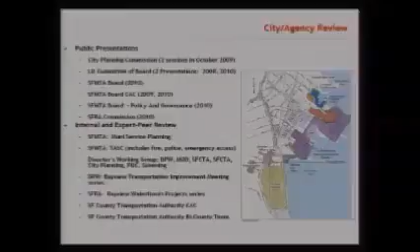What I'd like to really do with this presentation is explain my role as the MTA coordinator for the transportation issues here. The responsibility to make sure that this project, as it develops, reflects the priorities of the City and County of San Francisco, the priorities of MTA, and the priorities of the community processes that have gone on, has been my main responsibility.

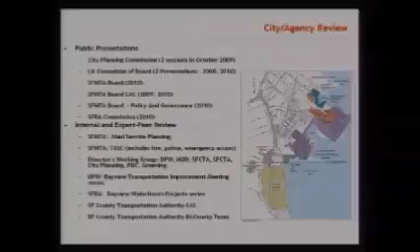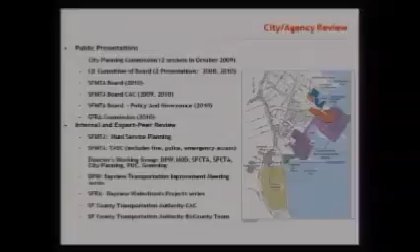This list that you see on the screen right now is a list of the public presentations we've gone through, including work with the Planning Commission. I've come before you last year twice, the Land Use Committee, the Board, the MTA Board, the MTA Board's committees, and the Redevelopment Agency Commission. I think it's especially conscientious of us to make sure we get the vetting and the technical input from the transportation professionals and engineers in the city that have the responsibility to implement and operate this transportation plan.

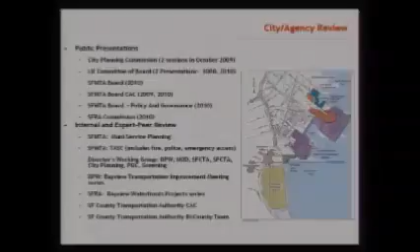In doing that, I worked very closely with Muni Service Planning. Muni Service Planning is the group that's behind the Transit Effectiveness Project. They're the people who have the methodology to analyze and develop a transit plan that is sustainable, a transit plan that is efficient. I also work closely with SFMTA's TASC, which is a review board that includes the fire, the police, the emergency access folks, DPW, and city planning, to make sure that as we design a roadway network, it is not just efficient, it's also safe, it's also flexible for times of emergency, and that it meets the criteria of all the codes that apply.

We, as a team, including MTA, brought the presentation before the Directors Working Group to make sure that the directors of key departments, including DPW, Mayor's Office of Disabilities, the Transportation Authority, the MTA, the City Planning Department, PUC, and Greening, had the chance to review and give input to the project as it was developing.

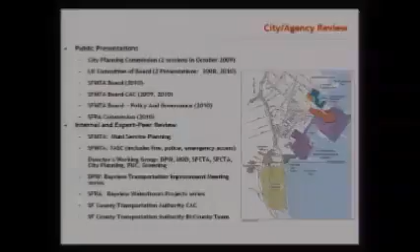There are major projects that were underway in the area. This is not the first transportation planning that's been going on in the southeastern part of the city by a long shot. And to make sure that we're paying attention to existing planning decisions and plans, we work closely with DPW's Bayview Transportation Improvements Project. We work very closely with the Redevelopment Agency and their Bayview Waterfronts Plan, which has included the environmental assessment. I worked very closely with the Transportation Authority on two levels. One is the bi-county team.

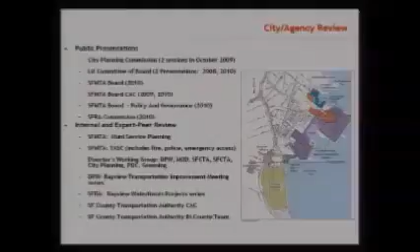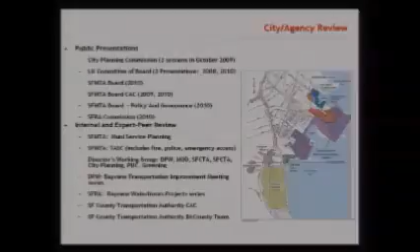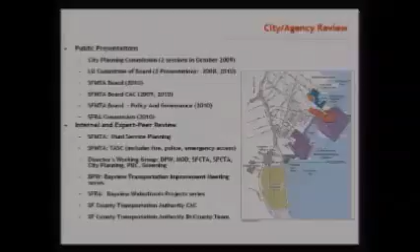The map that you see on the screen right now shows that there's much more going on in southeast San Francisco than just the Candlestick Point, Hunters Point Shipyard project. There's work going on in Executive Park, in Visitation Valley, in India Basin. And south of the city and county line, there's a major project going on in Brisbane. We needed to make sure that we were coordinating and being consistent with the transportation solutions coming out of those projects, and that we thought about the regional projects as well as the local projects and made sure that they dovetailed well, that there were seamless connections, and an overall more efficient transportation plan.

In that context, to develop a plan that worked for these neighborhoods, we wanted to use the benchmarks that the City of San Francisco already has set. For instance, a transit-first neighborhood. Per city policy, we looked at strong transit-served neighborhoods in San Francisco as our benchmark. Currently the broader area has a 66% drive-alone mode split for the commute period. Our goal was to have it lowered to 45%, which is consistent with a lot of neighborhoods in San Francisco, and then to nearly double the proportion of people who are taking transit to work.

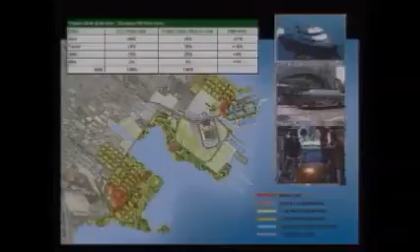To look at increasing the walk mode split and the bike mode split as well, to really get a multimodal transportation plan. It's not just a set of aspirational goals. It is the guidelines through which we develop the very infrastructure of this plan. Sizing the roadways, making sure we had the transit facilities, understanding the way transit operates, thinking about the bike connections and the pedestrian connections to make sure that this was truly multimodal and that we could build the best possible environment for the system to operate.

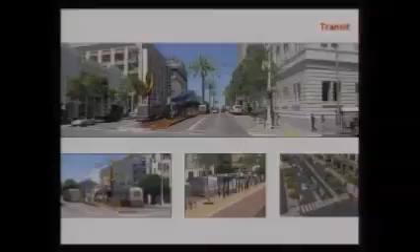Now, to walk through that environment, I'd like to take it mode by mode. We'll start with transit. The images on this page are bus rapid transit models. This is a very important signature part of our transportation plan in the shipyard. And these are images from San Francisco as we're going forward with bus rapid transit in a few key corridors. You've heard about Van Ness, you've heard about Geary.

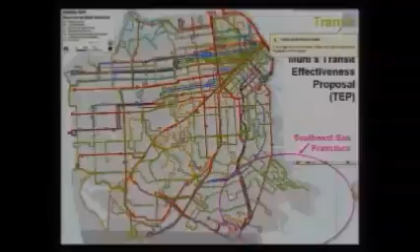This will be a part of the transportation network I'll explain, but I'd like to start off first by showing how we started approaching the transportation planning. The TEP, the Transit Effectiveness Project, is the latest and most current data and most comprehensive transit information that the city's had in 25 years. I work closely with Muni Service Planning to create as our base the Transit Effectiveness Project, and then to look specifically at the southeastern part of the city.

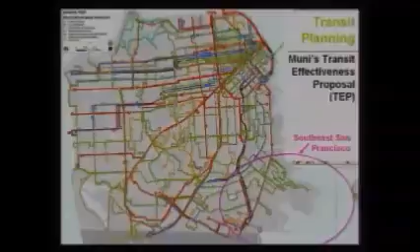If you see in the diagram, it is one of the most isolated neighborhoods in San Francisco from the perspective of transit service. Not just the Hunters Point Shipyard, not just the Candlestick Point area, but the neighborhoods that are adjacent to it. And the goal in developing a transit network here is to address that isolation, again, lift that whole corner of the city up to the level of good transit service that's enjoyed by so many neighborhoods in San Francisco. To do that, we wanted to start by looking at the local buses that came up to but didn't quite serve the Hunters Point Shipyard and Candlestick Point area.

This diagram shows those buses that, working with Muni Service Planning, we identified would be the best lines to extend into the community. They include the 24 Divisadero, the 48, the 29, the 28. If you know these lines, you know that they serve all four quadrants of San Francisco, and they give people in this new neighborhood a one-seat ride to neighborhoods outside their area.

And we also wanted to make sure that these would be efficient and affordable extensions, so we worked really carefully to make sure that if we extend these lines, we know how much that costs, we know what the vehicle needs for that would be, we know what facilities we would need in the future to maintain those vehicles. It's a fully allocated way of analyzing transit service.

So with the baseline of these lines, we wanted to pay attention to a very important connection for the area. Isolation for transit service isn't just local, it's also making sure, if we overcome this, that we have excellent connections to the regional systems. The regional systems we worked with from the base are BART, Caltrain, and although the T-Third is a Muni line, it serves like a trunk line that gives fast service between downtown and major transfer points.

To know the relationship between these local lines and the regional transit services, we had to identify where the hubs would be, to make sure that we're designing the frequencies and the connections with these hubs so that people can pretty effortlessly go from a local line to a regional line. That ends up being pretty important, not just for people who live here, but we realize that with the commercial and the recreation and destinations that are being proposed, you needed to make sure there was good regional access from outside San Francisco to this area.

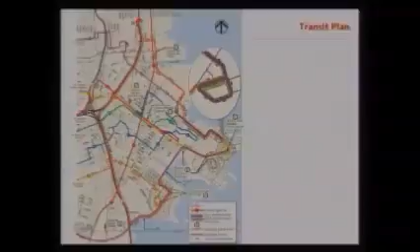That's the line we're proposing to be bus rapid transit. Bus rapid transit is like the light rail system in that it operates at high frequencies, higher speeds. It needs to be protected from mixed traffic.

So to design bus rapid transit, a key part of that is coming in through the interchange that we're working on with the Transportation Authority to make sure that the bus is not affected by freeway on-ramp and off-ramp traffic, to make sure it connects directly to the Caltrain station and BART, so we're designing a multimodal, multi-layer transit station at Bayshore Station with the help of the Transportation Authority, direct access to Balboa Park BART,

and then to connect the two neighborhoods as quickly and efficiently as possible and to minimize the risk of that bus rapid transit being delayed in traffic, which is one of the reasons that the Yosemite Slough Bridge, which you'll hear a lot about and which I'll present later in this presentation, ended up being such a key conduit for the transit planners at MTA to offer a protected right-of-way for buses where they would never have to deal with loading, parking, and mixed traffic, to help the buses become reliable.

Our models show that the reliability and traffic speeds for the bus rapid transit with such a facility brought tremendous transit mode split increases, both for people making the local trips and people relying on the bus rapid transit to get to regional hubs.

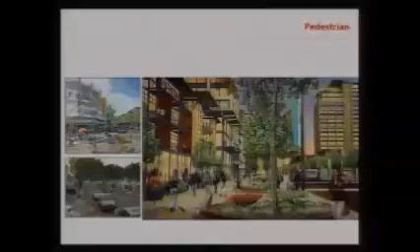The pedestrian network is also a key part of this plan. And in addition to working with the Better Streets concepts, which you should be familiar with if you're working in partnership with MTA, DPW, and the planning department, you'll see that we use the Better Streets plan to identify different street typologies: boulevards, residential streets, alleys.

We also use the strength of San Francisco's grid system to extend the grid in a pedestrian-oriented way from the existing Bayview neighborhood into the Hunters Point and Candlestick Point areas to make sure that people had safe and multiple pedestrian options to walk to and from the area. We felt that, like the transit network, to be able to offer improvements that address the broader southeastern part of the city as well as the shipyard and Candlestick Point was a very important goal.

Two other regional systems that are pedestrian trails incorporated here include the Bay Trail. We worked with ABAG to make sure that we had connections to their Bay Trail network, and the Blue Greenway, which offers a pedestrian and bikeway through the center of the city into the shoreline.

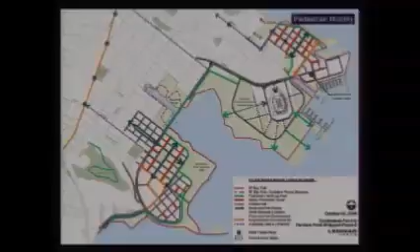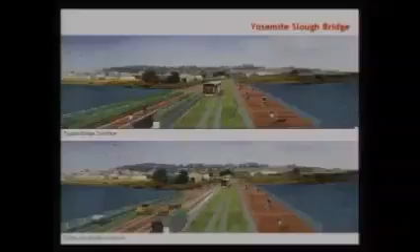In the stadium option, the eastern side of the bridge could accommodate as much as 4 lanes of automobile traffic to help with the egress and help ensure that automobiles leaving the stadium don't impact residential neighborhoods. But essentially, what is always intact is the bus rapid transit service and the pedestrian and bike network on the bay side.

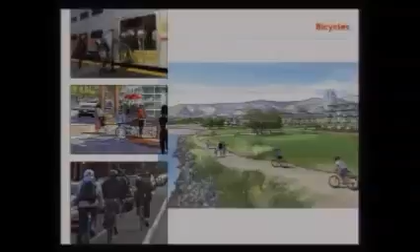The bicycle network as well, working with MTA, I worked very closely with the bicycle planning team. As you know, we've come over the hurdle of the injunction, and we're free now to implement bike networks. We wanted to make sure that the implementation of the bike network was consistent with the citywide bike plan, and that we strengthen portions of the bike network in this area to include bike lanes, off-street trails for recreational use, commute bike facilities that help people go quickly from one part of the area to the other. Again, that's where the Yosemite Slough Bridge became important because of the shortcut it offers bicyclists.

And then to make sure that we have the difference between a Class 1, Class 2, and Class 3 bike facility incorporated in the network so that we have that rich variety of different uses that people might want to make a bike trip for: commuting, recreation, residential, and transit connections.

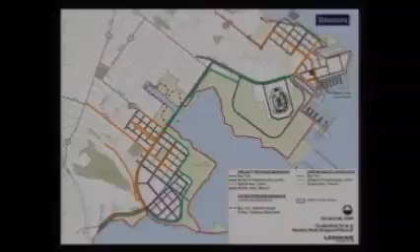And then accommodating the automobile program in the neighborhood includes not just the roads that are designed in the project area, but the connections from the project area to major arterials and to the freeways. Understanding the position of this area and its location at Hunters Point and Candlestick Point gave us access to 2 freeways, 101 and 280, but we wanted to design the roadways so that there would be capacity for special events

as well as day in, day out traffic management, and selecting key streets like Gilman, like Harney, like Innes, to allow the capacity to go from the project area to these arterials and the freeways, and to make sure that we protect the residential areas from traffic impacts and protect transit operations so that where there was a transit priority street, such as Palou, the traffic signalization and monitoring program and the management system would enable transit priority to function well.

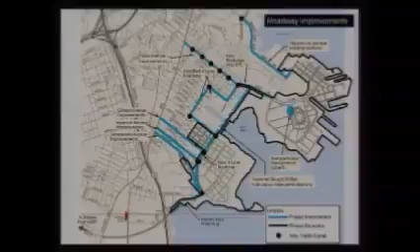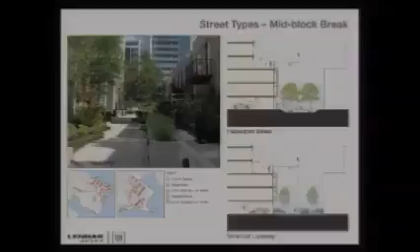These diagrams show how we've incorporated key parts of the Better Streets Plan into the area so that there's consistency with the Better Streets Plan and the quality of life that we hope to enhance in the project. For instance, the residential street types include mid-block breaks. These could be pedestrian-oriented alleys or lanes that accommodate vehicle traffic.

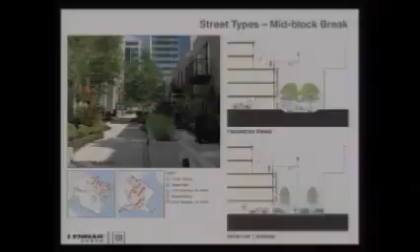They're consistent with the Better Streets Plan, but the point of these is critical, is that they are nice urban places to be, that the urban design of these streets includes landscaping, includes the dimensions to make sure that we minimize the negative impacts of transportation and maximize the public benefit of open space. Sidewalks are open space. And we realize that through an alley and boulevard network that's well designed and well landscaped, as we have this opportunity, we can build beautiful streets that are also functional.

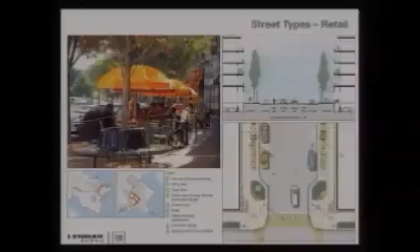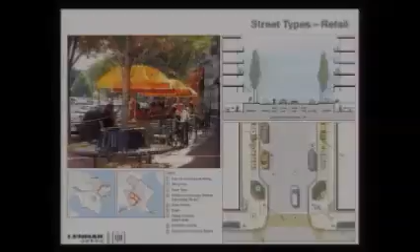That includes the retail component. The mixed uses that go on with retail include parking, loading, through traffic, transit, and pedestrian. To accommodate all of those complex functions, we looked at such measures as sidewalk bulbs, where they can be increasing safety for pedestrian crossings, right-of-way allocations for rapid transit buses and for local buses, on-street parking to help the retail, and at the same time through traffic on the right kinds of arterials to allow traffic operations that go through the area to be efficient.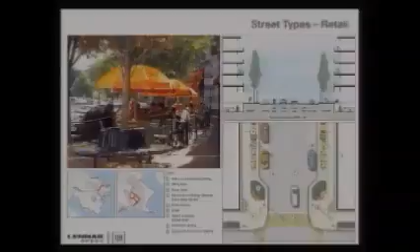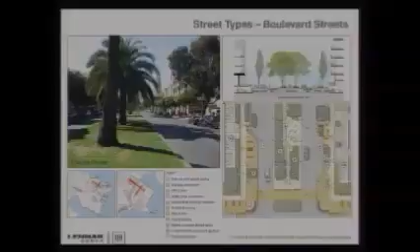I want to bring out an example of flexibility. It's very important that we understand that the transportation plan is implemented over phases. Not all of the transit network is needed when not all the development is there, but we want to make sure that the transit is in place as people move in so they can adopt a transit-oriented lifestyle and not have to live without transit service until a certain phase. So flexibility for phasing is very important. It is through all the modes.

The diagram that you see right here is Harney Way. And Harney shows big changes over the Harney that we know today. For instance, there is no transit on Harney Way right now. We include the bus rapid transit component. On the diagram, that's the right-of-way that's to the north edge of the street. North is up. To accommodate BRT, but then to allow the landscape medians to buffer people waiting for buses from the traffic and people living in a neighborhood like Executive Park from the traffic. We had this opportunity. We used the Better Streets guidelines to do that.

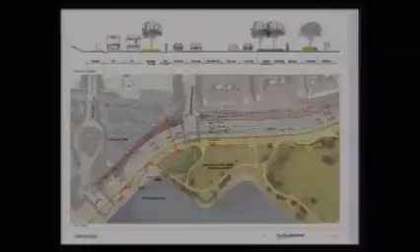But we also looked at future needs of Harney. And if, as the environmental review has shown, we possibly need to expand Harney to accommodate traffic, we wanted to build in that provision. So the two lanes that are on the very southern edge of the boulevard, they're shown in green, don't need to be fully developed until the traffic gets to the point where that's significant. And then we have the latitude in expanding that, 2 more lanes to accommodate Harney Way and still protect the bus operation and still design a pedestrian-friendly network. However, should we not need those lanes, we have the ability to keep them as they're shown right now, which are green medians that complement the state park and actually add a second layer of bike trails to the area.

So the bus rapid transit line, the local lines that come in through Palou are key parts of transit access to the stadium. We also allow shuttles and special charter buses to use these transit right-of-ways to reward the high occupancy vehicle mode split for the stadium access. We know how important it is that there be access to BART and Caltrain. And the bus rapid transit and local connections offer multiple connections to Glen Park BART, Balboa Park BART, the Caltrain station downtown, and the Caltrain station at Bayshore.

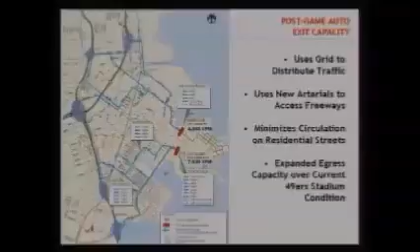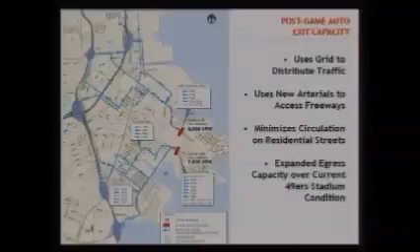And then finally, key corridors like Harney, Palou, Innes, and Gilman all are accommodating transit as well as accommodating the traffic egress. And you can see as you layer the transit and the roadway network that serve the stadium, we've looked at the capacity. We take advantage of the grid to disperse the traffic, but still focus the traffic on key arterials, to design those arterials for flexibility so we maintain capacity, and to point to both freeways, so not one freeway has the brunt of taking all the freeway traffic, as we know in the Candlestick situation today.

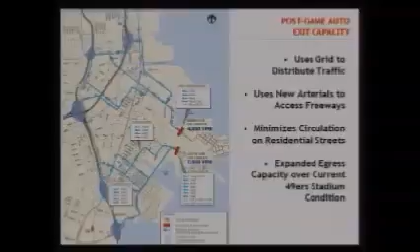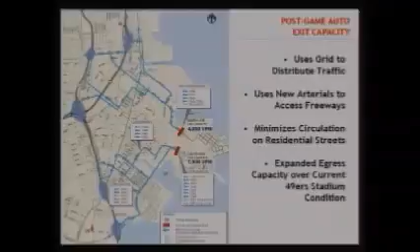And we also find that we have a much faster egress time in this plan than we have currently at 49ers because we use the grid, because we build the capacity, and because we keep the transit network separate and protected from the roadway network. All of these transit features and aspirations are what we're building into the project, but we also have ongoing programs to monitor our success, to use transportation demand management to tweak the system as we might need.

They include such features as a transit pass for every household in the development. That's a major feature. We'll see that in some other projects that I'm working on, for instance, at Treasure Island. But what it does is it really creates a huge incentive for people living there to consider transit a primary option if they don't have to worry about fumbling for change, that it becomes part of their lifestyle.

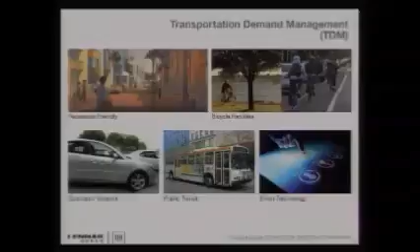We also look at car sharing and bike sharing to give people options to cars and bikes to help them make alternative trips. We look at smart technology, not just in the signaling and the transit preferential network, but also in real-time information at key locations so people can make a decision whether they want to stay and buy a coffee or they want to take the next bus that's coming in 4 minutes. Real-time as opposed to scheduling really does change travel behavior. As you know, in the Muni system, it's been a big success, and we'd like to roll it out not just at the stations, but within the developments themselves.

And that concludes my transportation presentation. At this point, I'll be around for transportation questions as well.

Thank you. I had some questions for Mr. Albert for transportation. Okay. So I read over your report in great detail, and it was very interesting. And I guess one of the first things I wanted to mention is you're looking at a higher split of walking and bicycling for the residents there. But I'm just wondering where they're going to walk to. I mean, it's a long ways to downtown, or what do you specifically mean by walk? Do you mean perhaps those who might work and live at the site? I like to walk long distances, but I think it's probably a little unrealistic to think that very many people are going to walk to their place of employment at that high a percentage.

So, thank you, Peter Albert again from SFMTA. Part of the project that really has affected the transportation mode splits is the specific mixes of land uses. And there are a lot of walk trips generated when you put mixed use in proximity to residential. So you have walk trips that might be errands, walk trips that might be to work, walk trips that might be to recreation, residential trips to other residential trips, walk trips to destinations in themselves. And we don't count the walk trips to transit as a separate walk trip. We often count that as a transit mode split, but that ends up being a very big part of it. So in some ways, the walk trip percentage is underrepresented.